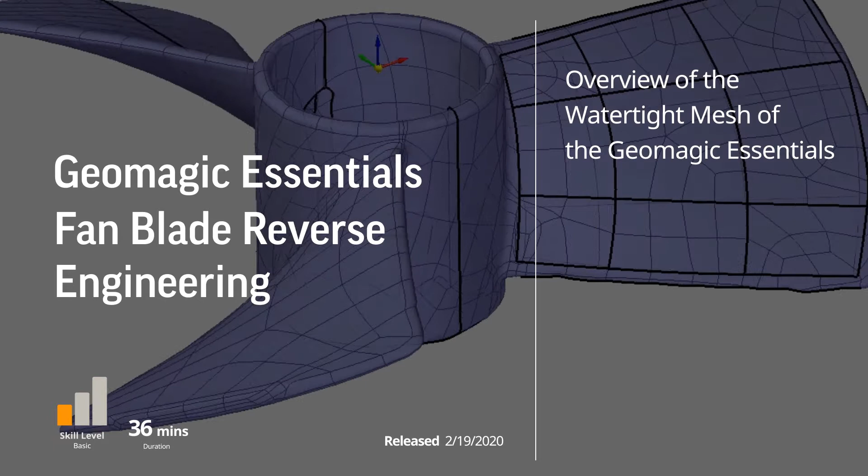This is a basic demonstration of Geomagic Essentials and how it can extract CAD information and send it over to Solid Edge. On screen you see I have a fan blade that was scanned, and this is how the data will come up inside Geomagic Essentials.

You already have a polygon, and in many cases you don't really have to do any cleanup, but I left some of the data to clean up so we'd have time to demonstrate how I would remove areas and repair the mesh before extracting CAD information and sending that over.

As you can see, I put the fan on top of this sphere. So if I want to remove that bottom area, I can look at it from the side, and grab tools from the right hand side. In this case, the lasso tool.

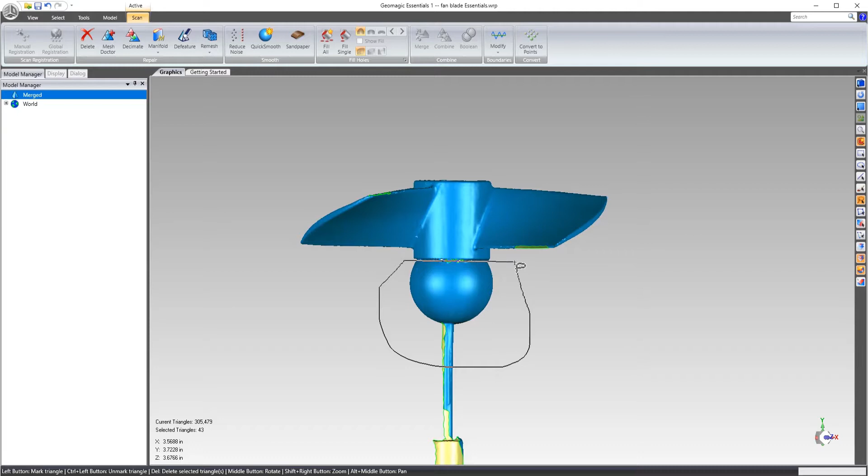I'm going to change it over to select through. With this, I can come in and window-select through, and you'll see it'll go all the way to the other side. Then if I hit delete, I can remove those areas.

If I want to do it again to get a little closer to that edge, I can do that. So I just come in, select, and then hit delete there.

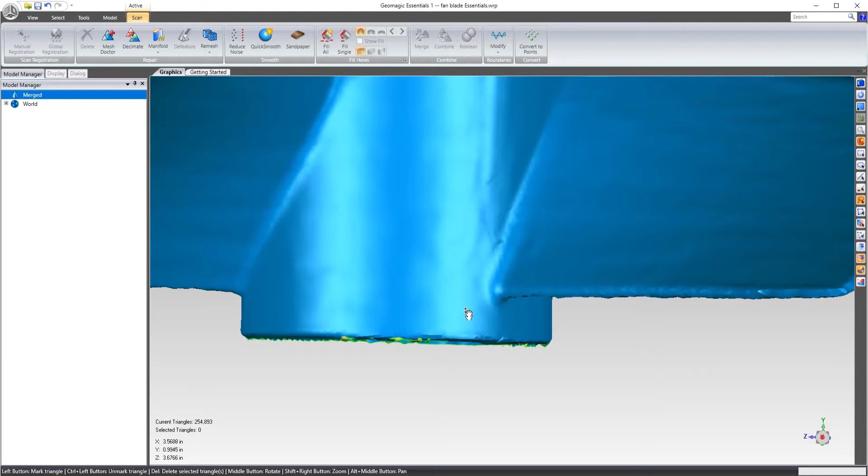There are a few different areas around the part where there are some defects. What I like to do is run what we call the mesh doctor first, because that will correct some stuff automatically and make less work for me. These 7 checkboxes on the left are 7 different categories of problems we find with scanned meshes, and if I hit apply, it'll automatically repair those.

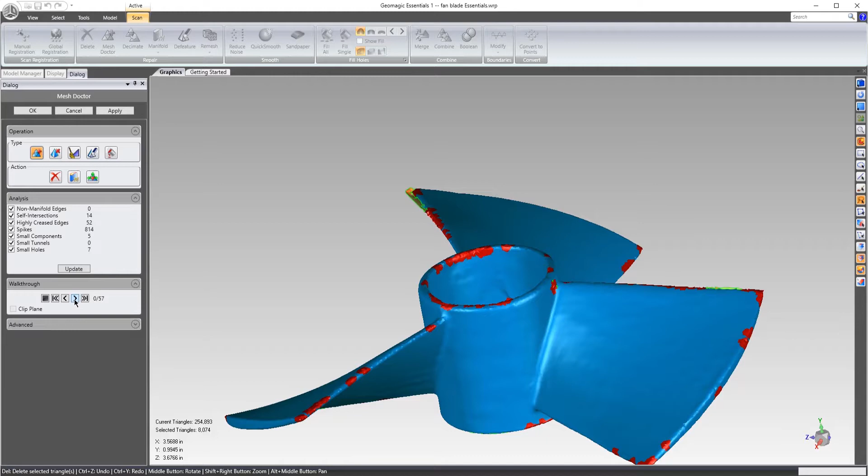But if there's any reason for me to look at those individual areas, I can hit walkthrough mode, and it'll show me each one of those areas if I want to evaluate it and possibly edit it on my own.

So if I hit apply, the software will automatically repair all those areas on the mesh for me. Now you'll notice there are still some holes. Those green boundaries show that there are hole areas we can repair.

The next step after mesh doctor finishes is taking the data and filling the holes for those green boundaries. If I give it a second longer here, it will finish repairing those areas, and you'll see it'll have all zeros there.

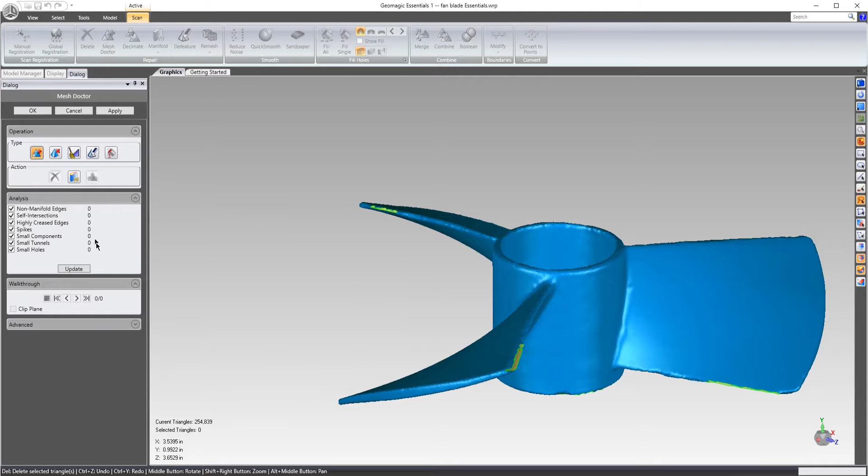Now if I just look around, you can see there's a couple of holes. So if I come over to the fill single tool up top, there are 3 different filling algorithms to the hole fill tool, and below there are 3 different approaches to filling.

So filling the complete boundary, filling part of the boundary, or bridging the boundary. Up top is the method used to make up those missing triangles. If I just click on a boundary, it'll automatically fill using that curvature-based method.

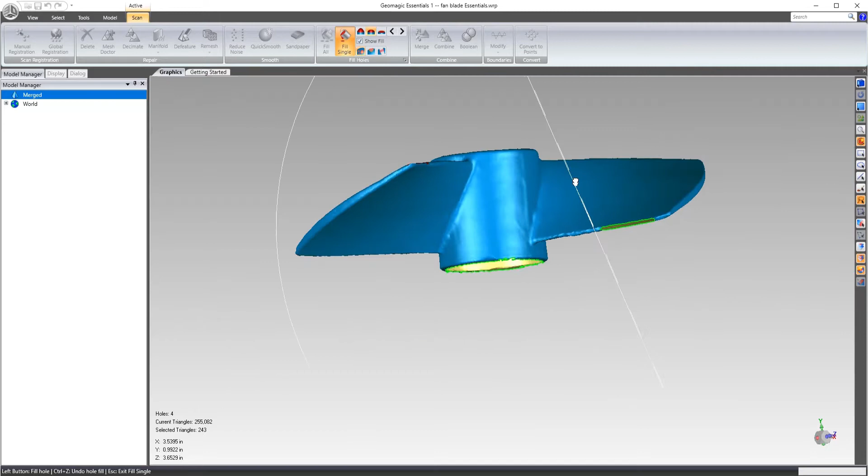Curvature-based method is probably the easiest to start with. Then there's a tangent fill and a flat fill. Flat fill is kind of obvious, it tries to cap off a hole with the flattest approach possible. With tangent, it tries to maintain a nice smooth boundary edge while also maintaining a flat, less curvature approach to the fill.

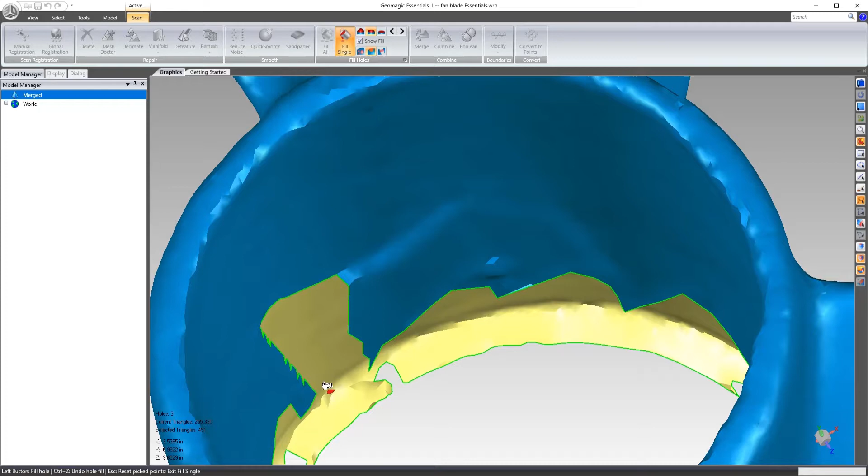This is an example of a fill partial. You can come around and select from two points, then select the side, and you'll see it fills that boundary.

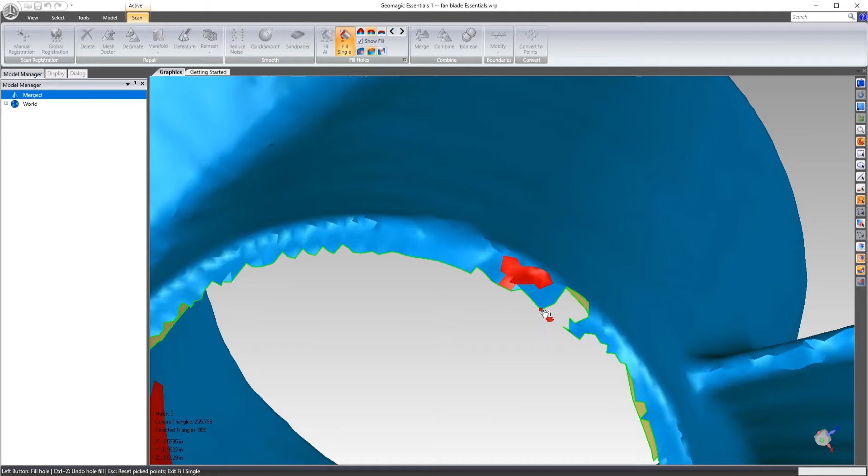And then on the bottom, if you wanted to mess with these, you can also do some fill partials here. But it's not necessary to fill everything because we're not really going to use all this. I just point out that these tools are here in case you need them.

After I get done hole filling, I almost always make sure that I run Mesh Doctor one more time. There's a chance that it will find a few different areas with the hole fill, and I go ahead and run that. It should only take a second when you run it after finishing hole filling, to repair any twisted triangles or anything like that.

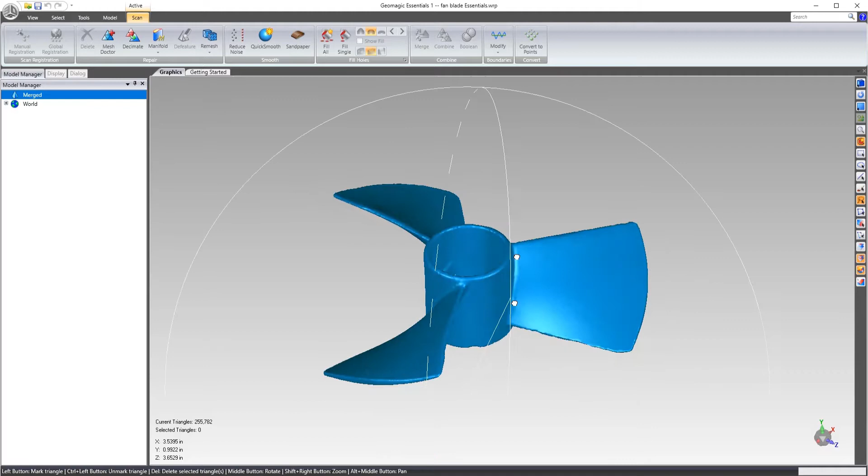So now we have a data set that I want to extract geometry from. But before I can do that, if I click on the widget down here, you'll notice that the part is pretty square to the world axis. But if I come over to display and turn on the world coordinate system, you'll see that the coordinate system is way over here, far away from the world coordinate system. So what we need to do is align this object to the world coordinate system.

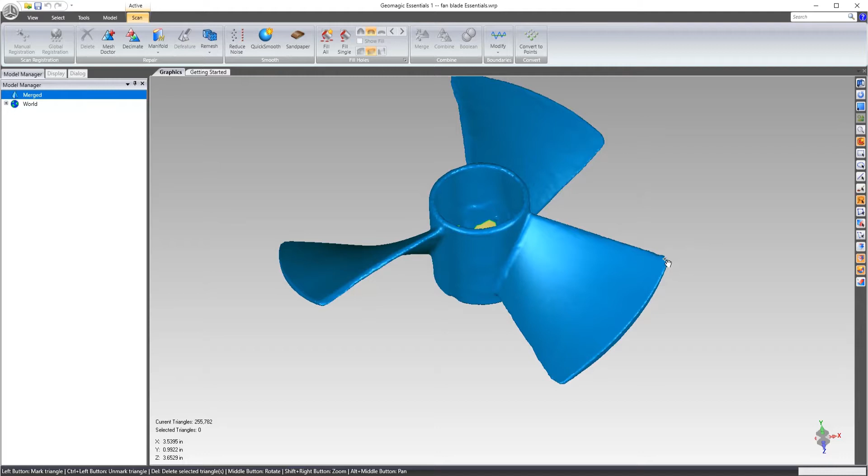With a fan blade, what I typically use is the axis, the central axis, and maybe the top plane. A lot of times I will grab one of the impeller blades and then fit a point there to index it. So I'm going to go ahead and create that geometry, and I'll show you how that works.

If I come over to model, what I'll do is come over and create a line based off this first option, cylinder axis. You can come in and use the same tools that we use for selection, the lasso tool, but make sure that you turn off select through and toggle it back over to select visible. So you can window in areas like this to select that outer cylinder to create a cylinder axis.

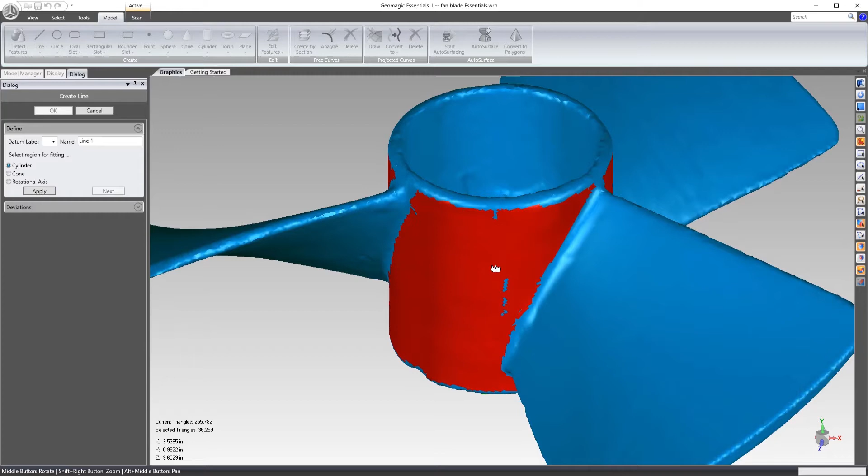But what I like to do is use this option right here, this crease angle tool. When I click and hold with my mouse and drag up on screen, it will select more and less data. So you see it went all the way around and essentially grabbed all the faces that I want to use to create a cylinder axis. So if I just hit next and OK, we just fit a cylinder axis there.

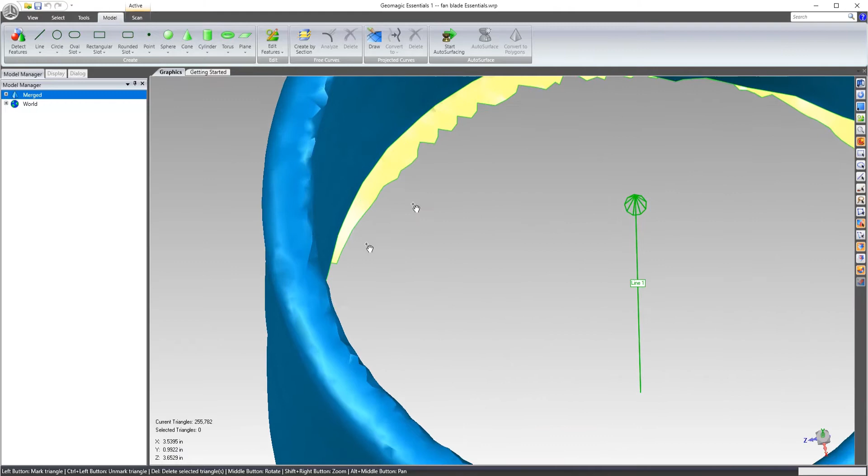Now the next step is to put a plane on top. The top surface isn't as well defined because it's a pretty sharp, small landing area. So what I like to do is grab that lasso selection tool and just click some areas on that top surface, because there's so much curvature there that's not enough for that other method to work.

And then this will give me enough averaging all the way around the outside that I can get a pretty good plane. Not only that, when I do the alignment here, I'm going to use that central axis as my main axis anyway. So that's going to be the primary axis of alignment.

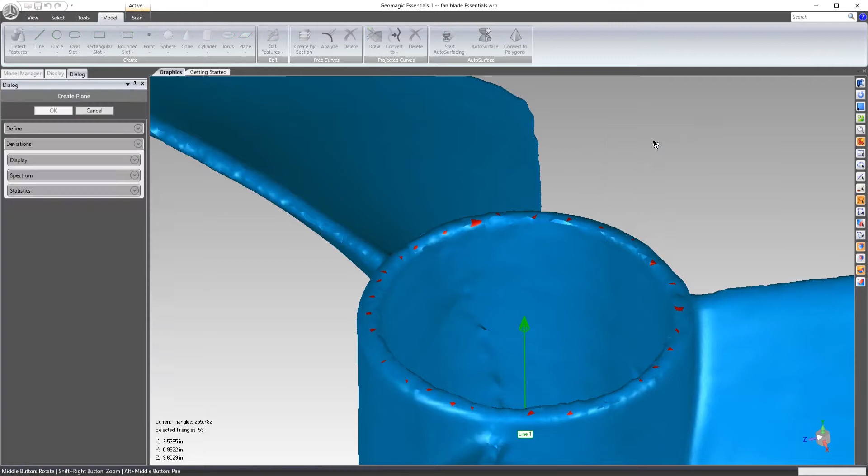What I do now is if I right click in the open space on screen, you see that we do put the shortcuts for plane and cylinder. So if I click the plane, I can hit apply, and you'll see that it best fits a plane to that surface. So then I'll hit apply and OK.

Now, if I want to intersect those two, the axis and the plane, I can come over to point, and you'll see plane and line. Then I can actually select that plane and the line that I created, and create an intersection point there.

The reason why I did that is I'm going to come over here and select a little bit of the tip there, and then I'm just going to fit a centroid point, and this is just to give me something to clock it to. I could fit a line there if that line was straight, but in this case I'm just going to use that point.

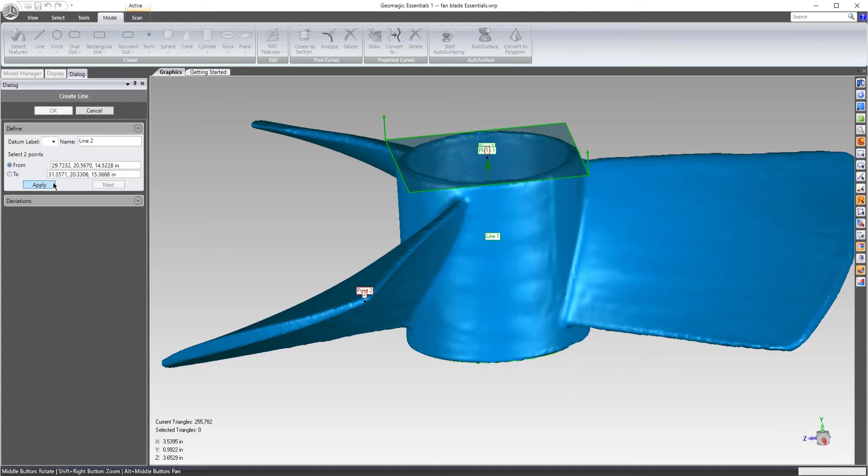In this instance, I'm going to grab that point and come over to a 2-point line. You can see I can click the from and to, and then hit apply, and it creates a line there. So there, I essentially created enough geometry to create an alignment.

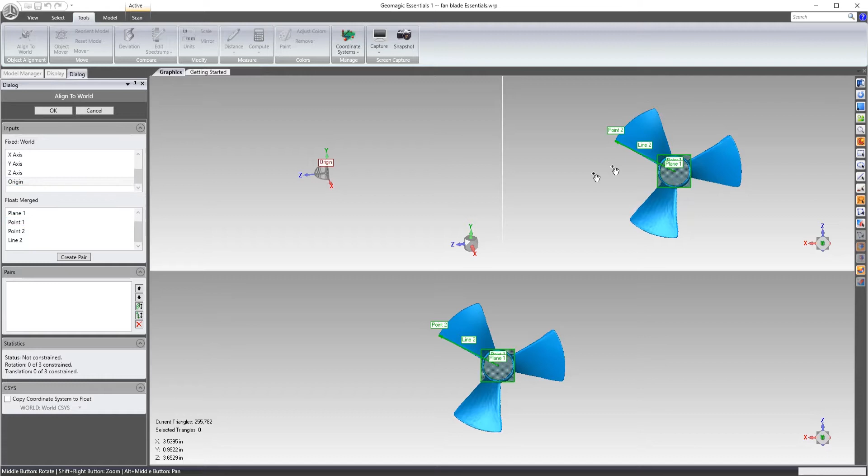So now, if I come over to my tools and click align to world, the top is all of the things in the geometry already, so the X, Y, all these planes and axes, and even the origin. And then the floating is all the geometry that's on my model.

So what we're going to do is click on that center point and the origin and create a pair. And we will do that one more time. We're going to create a center point and the origin.

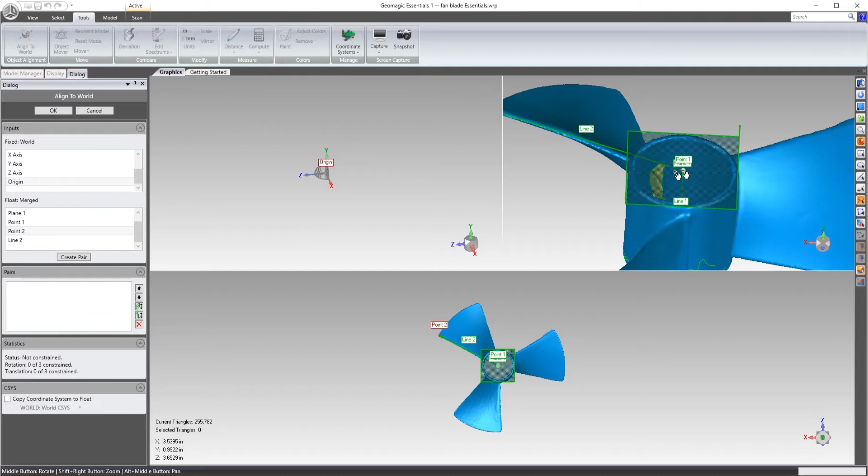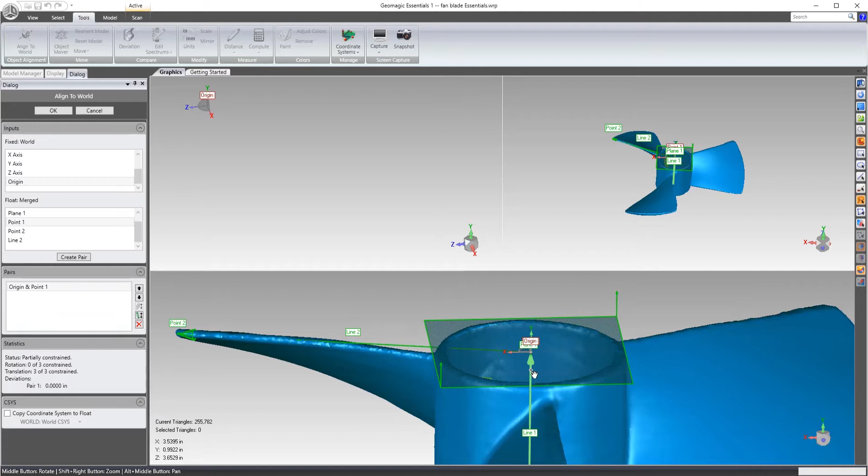Actually, I think the issue is I clicked the line, so let's do that one more time. I click on the point, the origin, create a pair. Now we locked in the wrong point, so I'm going to delete that one. I clicked point 2. If I click on point 1 and the origin and create pair, now you'll see the coordinate system is sitting on top of that axis, exactly where we created that point.

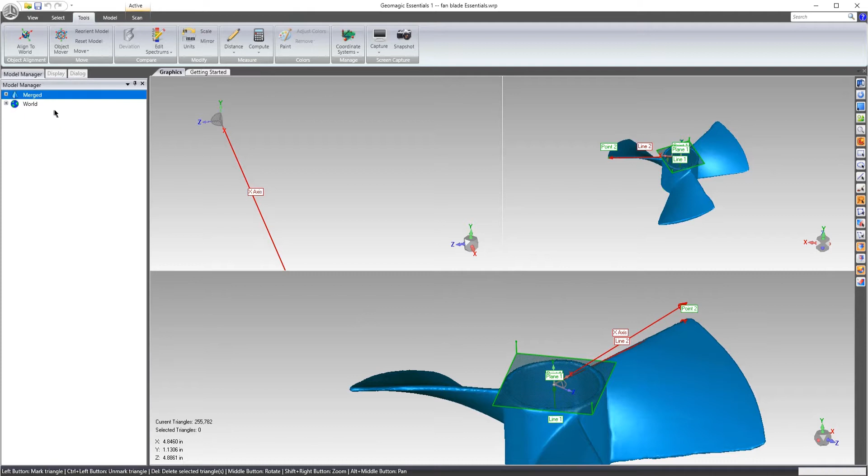Now what I'm going to do is square up that axis to the other two pieces of geometry. I'll take that line and align it with the y-axis, and it'll square that up. Then to clock it, I'll align the x-axis with my other line, that line 2 we created, and it will square that up. Since these stack on top of each other, the point, then the axis, then that line, it's not locking those two together, it's only rotating it until it matches. When I hit OK, you'll see that it squares up the alignment of this part, aligned to the world coordinate system.

So now that I have that, I can go ahead and cut cross sections and create curves. So now begins the modeling portion of the demonstration.

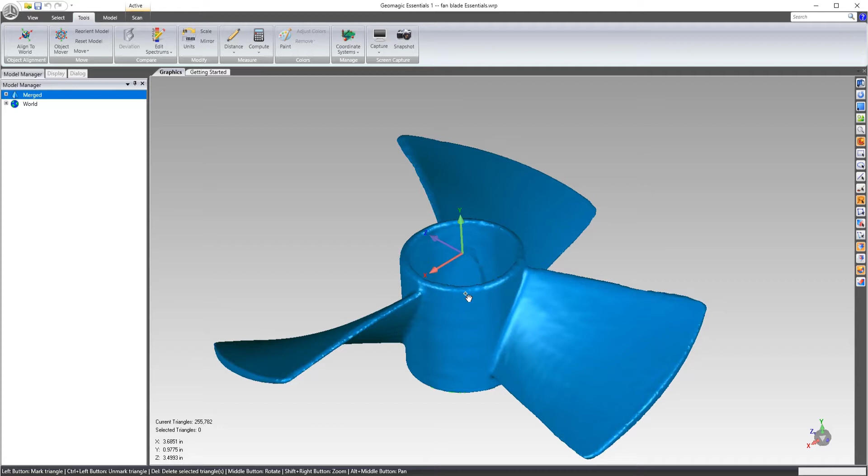What we're going to do is cut a cross section through the center of the part, so I have enough geometry to create that revolution or extrusion, depending on how I want to do it. And then we'll create geometry that represents that fan blade.

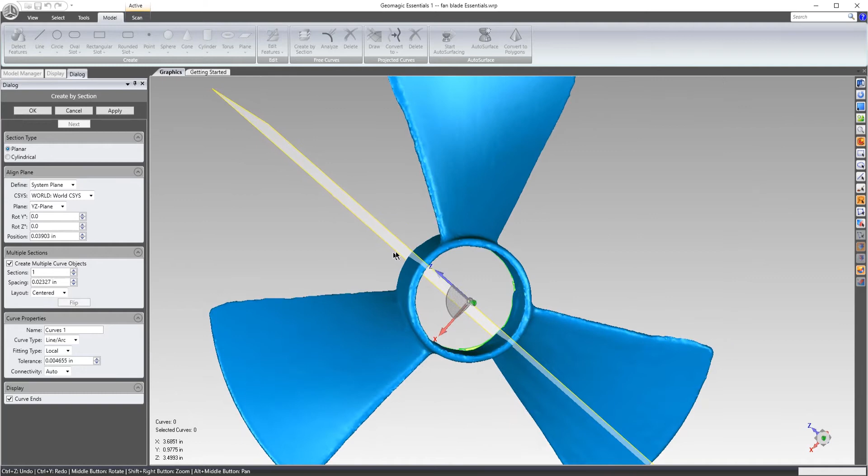The first thing we're going to do is cut a cross section. You can see I can toggle and change the cross sections over here. I'm going to use the YZ plane and slice through in that direction, then make sure that the position is at 0, so it'll move it so it intersects the 0.

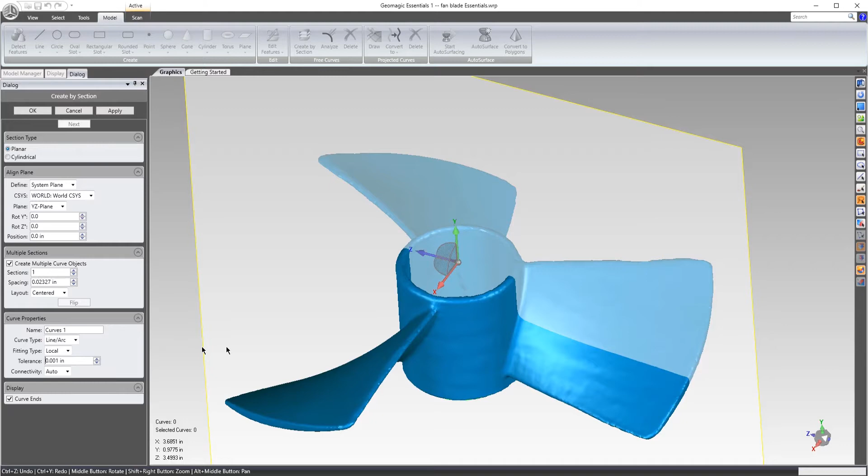Now down below you have an option. You can tell the software to cut a cross section through the polygon mesh with a spline, line arc, or polyline. For a highly organic shape I would use a spline, but for something pretty prismatic, in this case, I'm going to use the line arc option. Then I'll tell the software to go ahead and fit that, and I'll adjust the tolerance all the way down to about 1/1000th of an inch. When I hit apply, you'll see that it creates a sketch cross section through that geometry for me.

Then if I hit next and OK, you see now that I have these curves. So if I hide that polygon, I have the curves cross section.

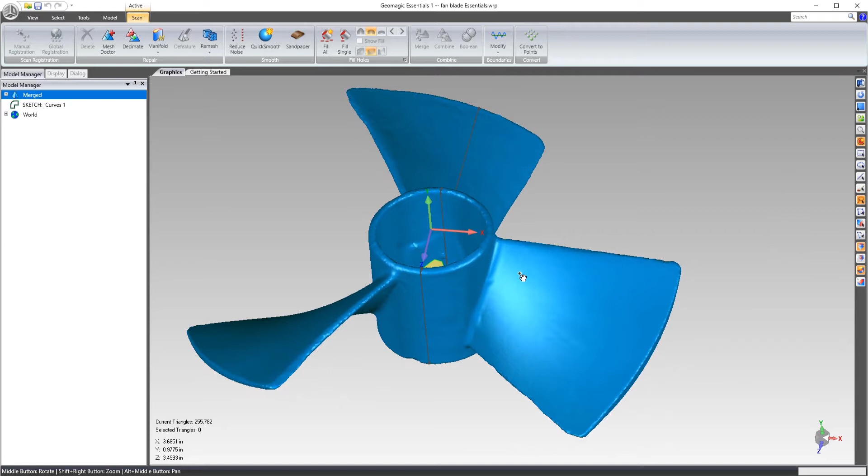So now if I toggle back over to the polygon mesh, the way we'll do the blade is this. I'll identify which blade I'd like to use. In this instance, I'm going to use this one, the one that I went ahead and used to align to the x-axis. And if I want to just send curves over into Solid Edge, the best way to do that is to come over to the model, and there's this draw curves option.

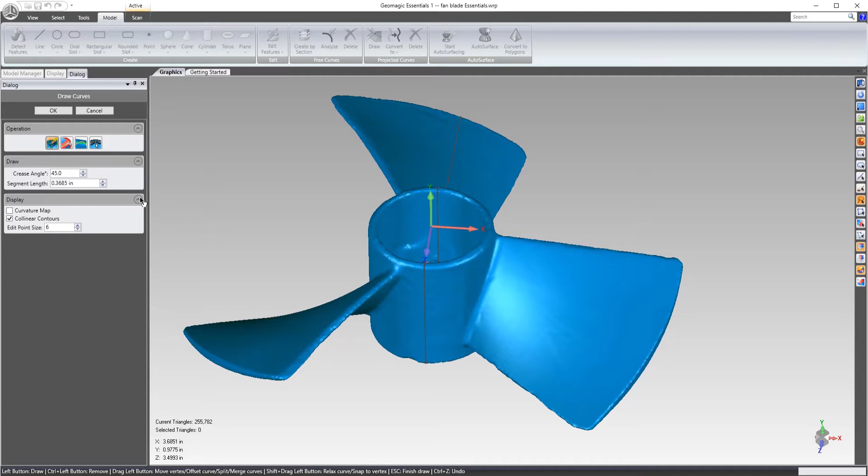So you saw before I did create cross section through a mesh. Now I'm going to draw curves directly on the mesh. This dialog can be a little confusing when you first see it, but if you basically use the first tool and then look at the options down here on the left hand side, it's not quite as confusing once you understand a couple things.

So if I click on the mesh, you can see that I can just draw curves on the surface of the mesh. Once I get to a corner, if I hit escape, it will end that curve. If I need to drag anything around, I can just roll over and drag the nodes of the spline. If I need to remove any of these nodes, I hold Control and can remove them from the spline. Then if I click back on, I can create a new one, but I need to hit Escape again to get out of it, because otherwise it'll start drawing another line.

So speaking of that, if I come over here and start drawing, I can create another spline and then hit Escape. Again, you can always come back and manipulate the curves and move them around. A red node is an endpoint that divides up multiple splines. So essentially, if a spline has all orange dots, it's all one spline, and a red node like that means that's the beginning and end of a spline.

So you can see that. And you can actually convert these points to using endpoints, and you see that all the options are down here below. So to try to get more accuracy here, I'll just create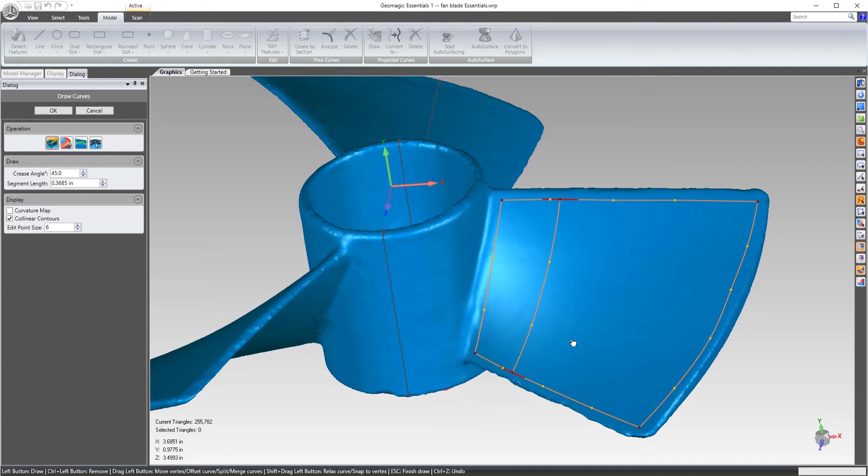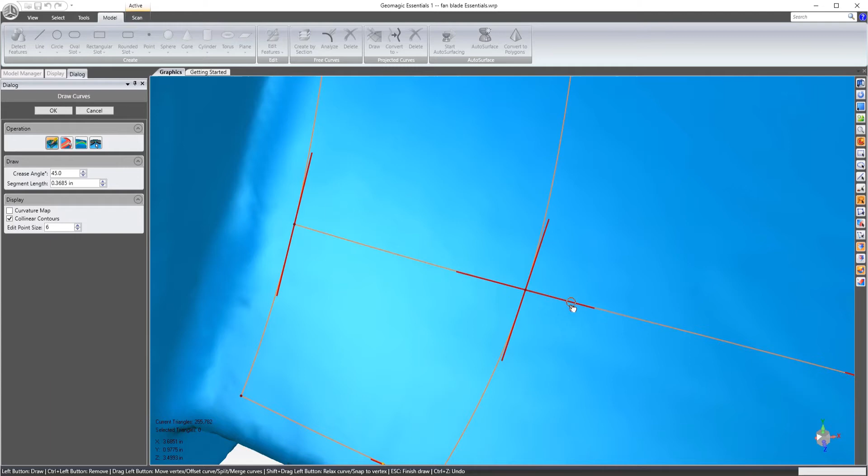Some cross sections through the blade. And you'll notice those red curvature collinear contours. What that is, it's showing you that there is tangency there. So there's a shortcut here. If I click and hold and drag from one side to the other, I can turn tangency off or on. But they just show you that it's there or not, so you don't have to use them.

In this instance, it's probably not that important, because on the Solid Edge side, these are just going to be used as a guide anyway. So these are just to give me enough resolution to draw them inside of Solid Edge, or convert them inside of Solid Edge. So you can see that I went ahead and I selected those curves and I drew them.

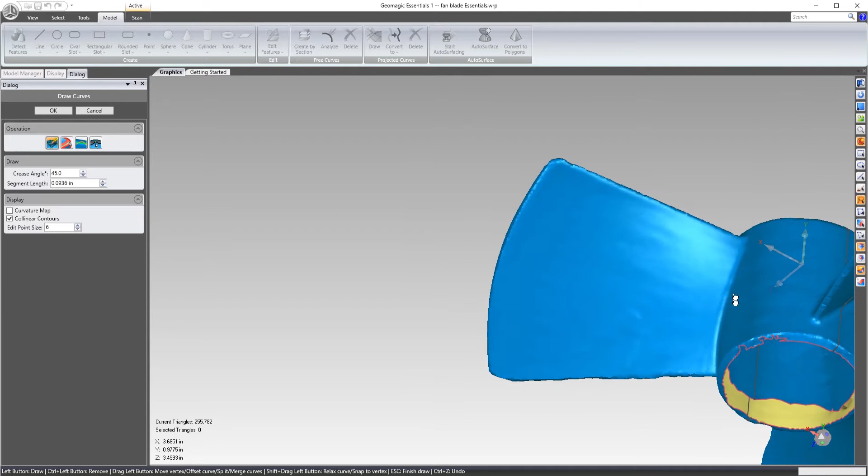Now, actually, let's go in and draw them on the other side, because this isn't necessarily a constant thickness blade. If it was, I would just draw one side and offset the surface that I use, which many of the companies that make these all know when they're designing it whether it's supposed to be an offset or a constant thickness blade.

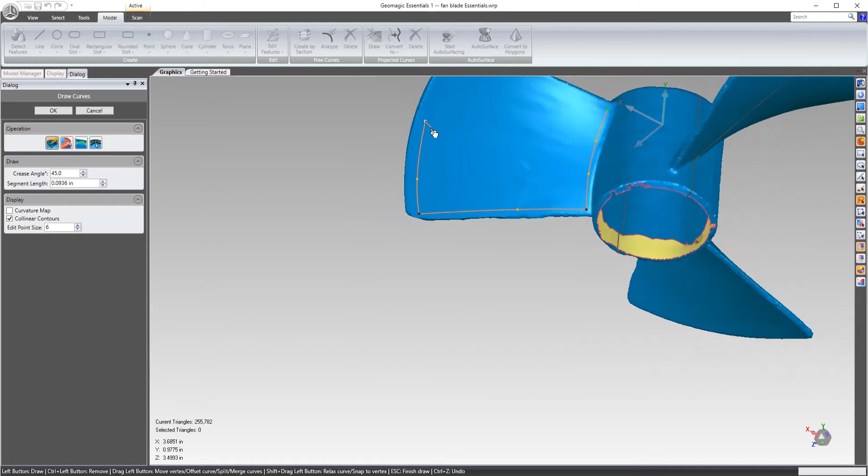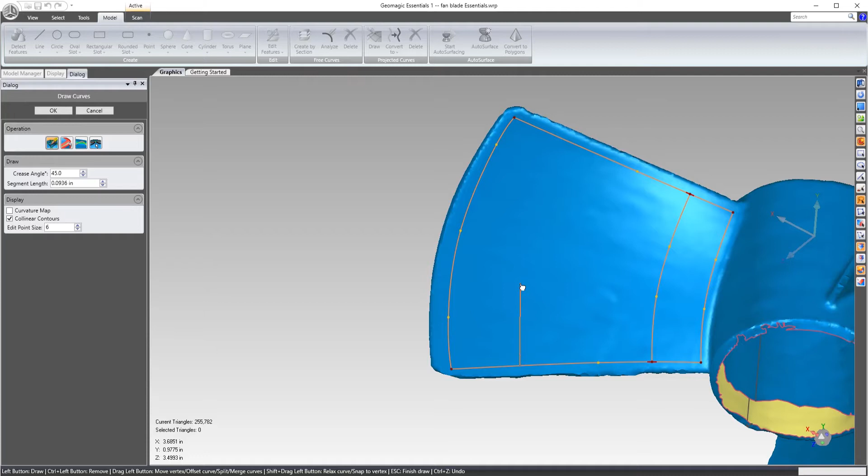So I'll do the same thing, and I'll just come around. And then draw these. Actually, let's undo that one and end that right there. And let's start that one again. There.

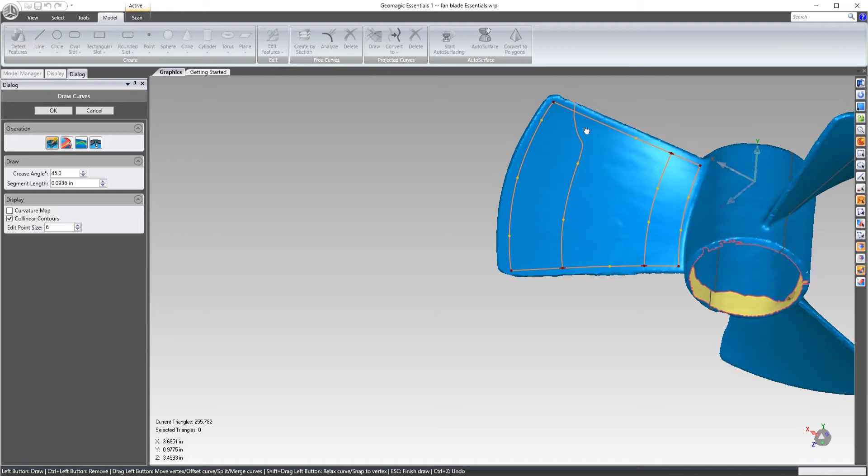Now I'll just draw these last few. There. And you can move these. So if I want to drag this out, it's really handy to be able to slide these around and add points. So if I add a point and then move this, so if I want it to follow the flow of the surface here.

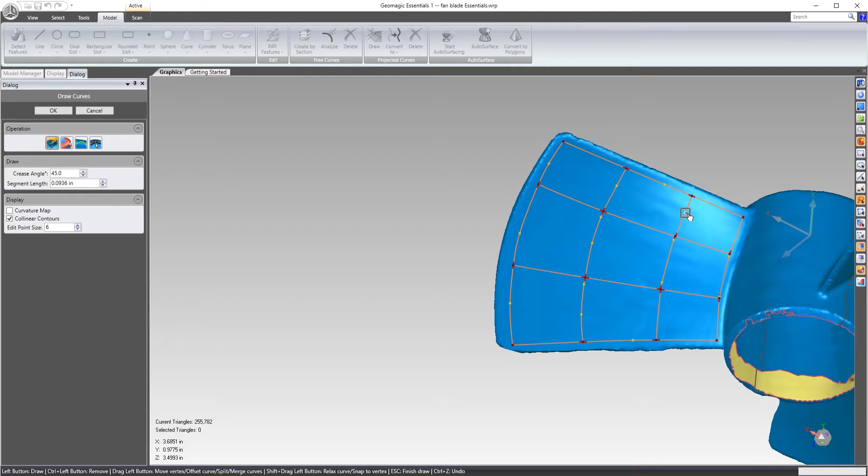And once I'm done, I have the curves. The next step is to convert the curves to free curves. And in this instance, again, I'll lower the spacing to like half a thou just to give it a little extra accuracy. And it's telling me that the lowest it can do is 2 thou, which is fine.

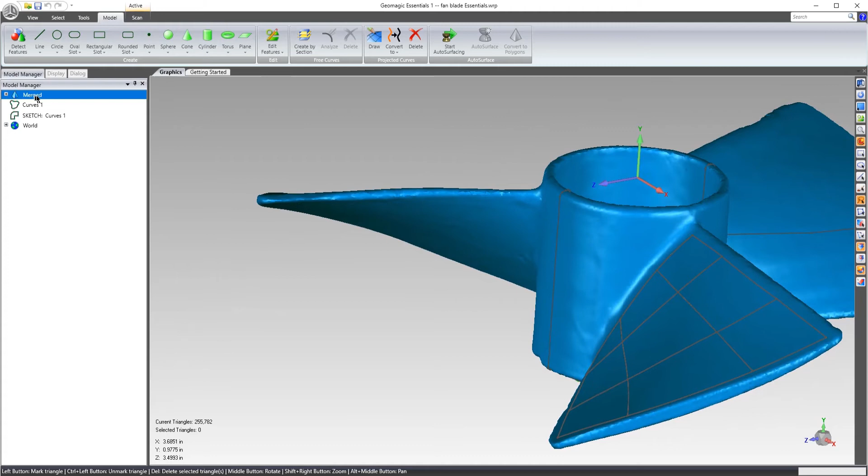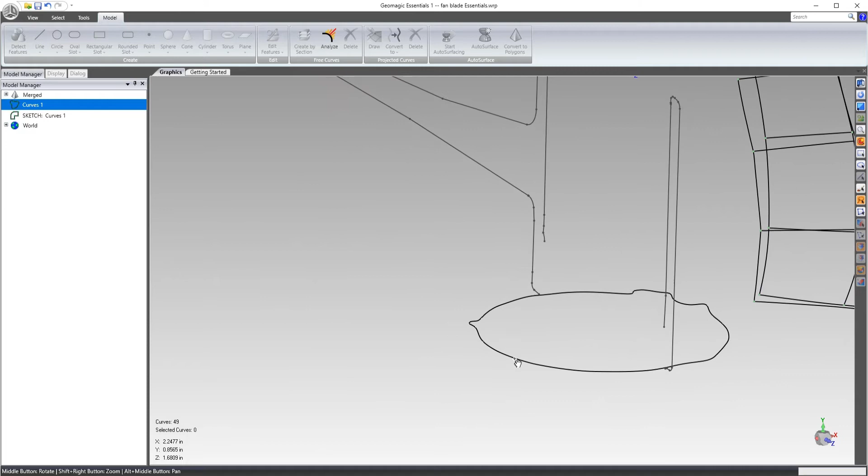So now, if I hide this, I have curves. So when you use that convert to, it also converts the boundaries of the mesh. So if I don't want that, I can actually just click on it and delete it. The same thing goes here. So if there's holes in the mesh, those will show up in there. So I'm not gonna bother deleting that. It's nice to have that one just as an example to show where it is, but you can see all my curves.

And then the other thing that you can do with this, so there's 3 types of geometry that we can extract from the model. One of them is prismatic features, which we used for alignment in this instance. The second one is cross-section curves. The third, actually 4 types of geometry, is cross-section curves and splines on the mesh. I guess you could create curves, whether they're 3D or 2D, as one object. And then the other one is auto-surfacing the object. So auto surface will go ahead and wrap a surface around the outside of this object and create a CAD body that you can then export and send it over to Solid Edge.

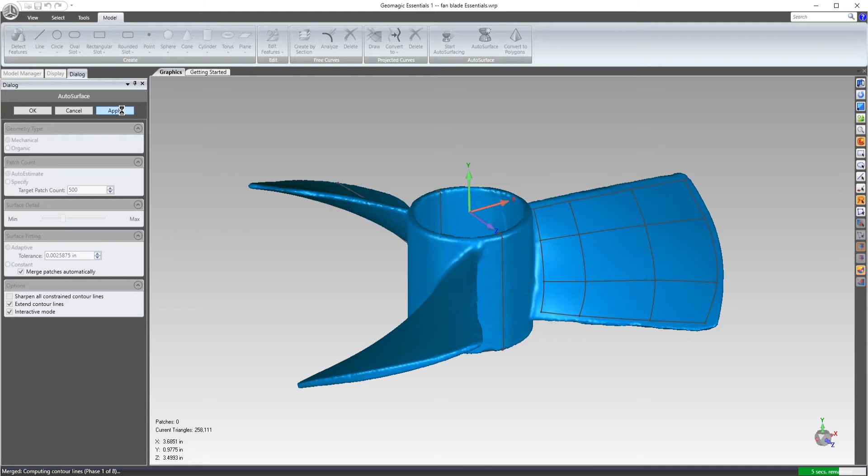So now the auto surface is finished. So you can see the curves, the CAD solid—well, it's a surface, not a solid—and the features. So I can write all of these to an IGES file and send them over to Solid Edge. So if I grab all of these, I can save them out to an IGES. So that's the next step, is to go ahead and save these over to Solid Edge.

So if I just come over to Save As, IGES, and it will just name my file.

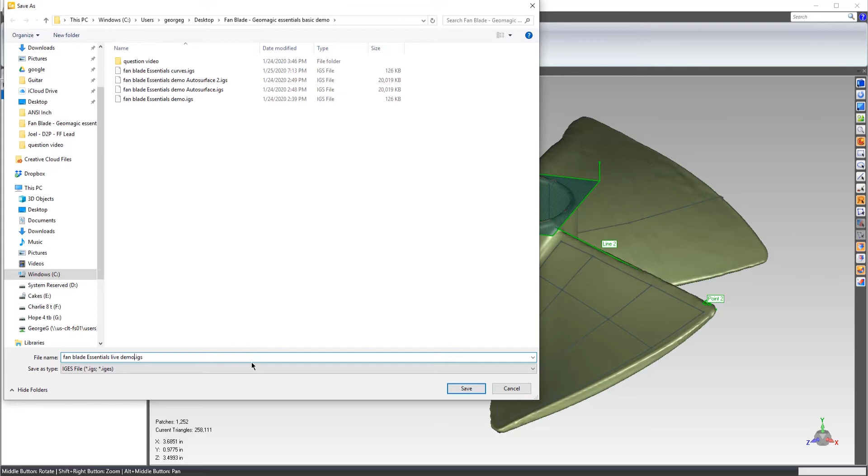And write those out. It pops up with an export option dialog, so you can actually tell it to not write out the NURB surfaces if you don't want those, or don't want the features or curves. So you can choose what you want it to write, and then you can actually tell it to write in a single file. So I'll hit save.

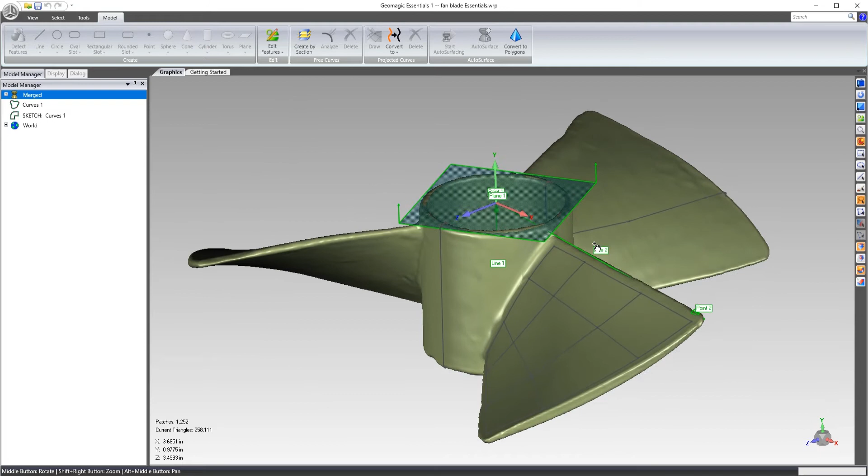Now all you have to do is open that geometry inside of Solid Edge and use that to start modeling. In the next portion of the demo, I'll show a little bit about Solid Edge modeling and how you can take that geometry. I'm not a Solid Edge expert by any means, but I can definitely show you some of the basics to get that data inside of Solid Edge.

So now for this portion, we're going to finish the part inside of Solid Edge. As you can see here on screen, I have the auto-surfaced portion of the model and the curves in the same workspace. So if I turn off the surfaces, I exported the curves from Geomagic Essentials.

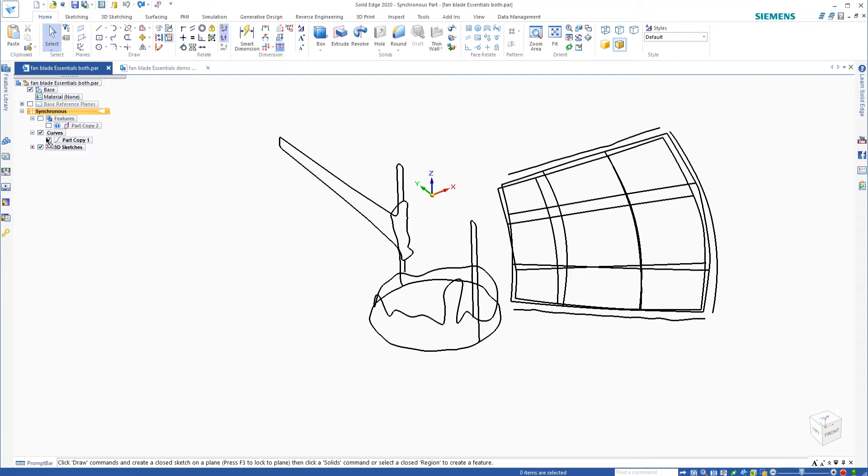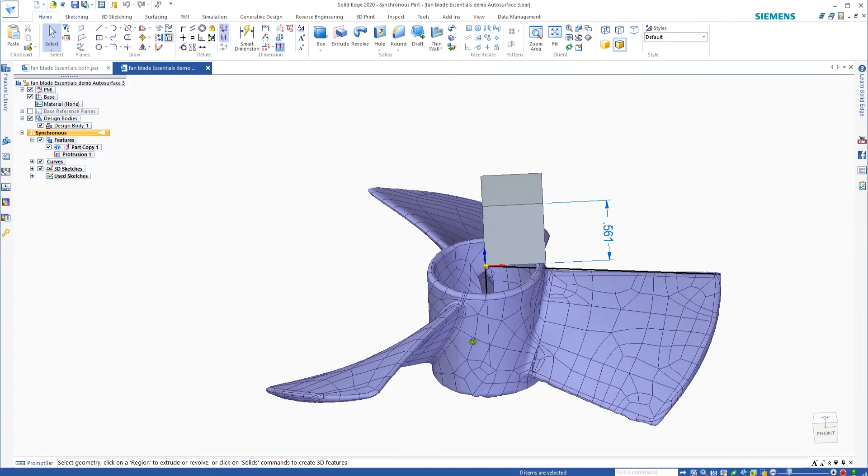And then I exported the auto surface. What I did is I went over to the application and imported each IGES file from Geomagic Essentials, brought them in and saved out the part. Then I came over and I took one part and copied and pasted it inside of another, so that we have both the curves and the surface inside of the one workspace.

So now you can reverse engineer using the Solid Edge tools in whatever fashion you want to. For today, just to keep it simple, I'm not an expert in Solid Edge, so what I'm going to do is use the curves to reverse engineer this part, and then use the auto surface as a reference to see where I'm at and what I'm modeling.

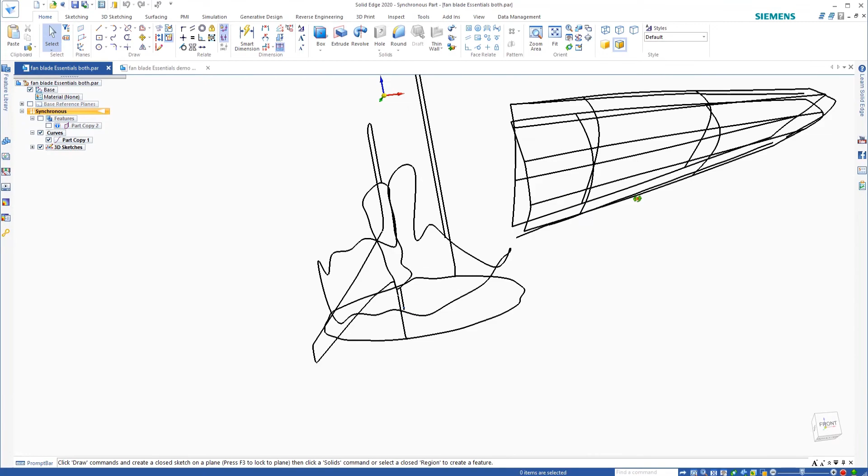So the first thing I'm going to do is go ahead and model the fan blade here. As you see, I have the curves that I brought in from Essentials. In order to do that, I'm going to come over to the surfacing tab and create keypoint curves over top of the curves that I brought in.

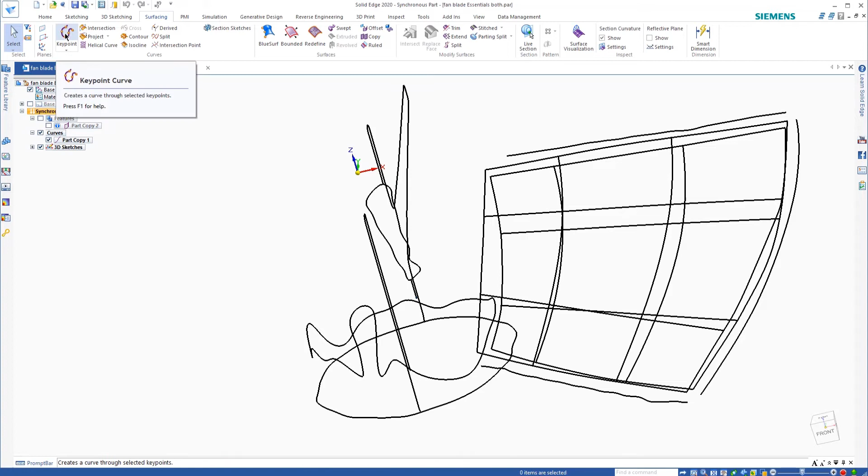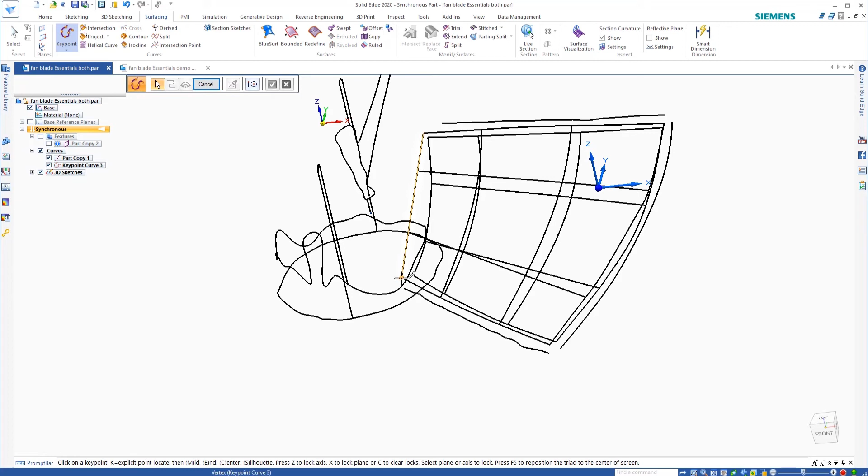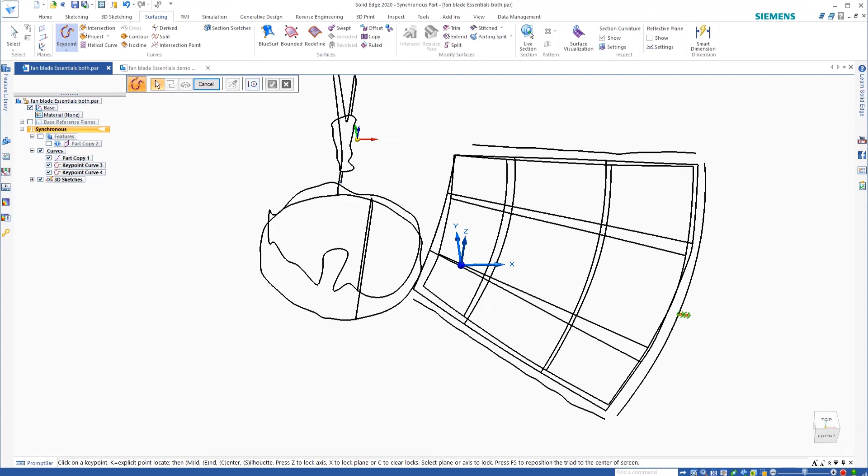So what I'm going to do is go ahead and draw over top of nice clean keypoint curves. I'll come over to keypoint and draw right over this. I may fast forward this a little bit so you don't have to watch me go over every single one, but I click finish on that first curve. Now, just to show you that I did do that, I'll turn off my initial curves and see that I drew that curve directly over top of the other ones.

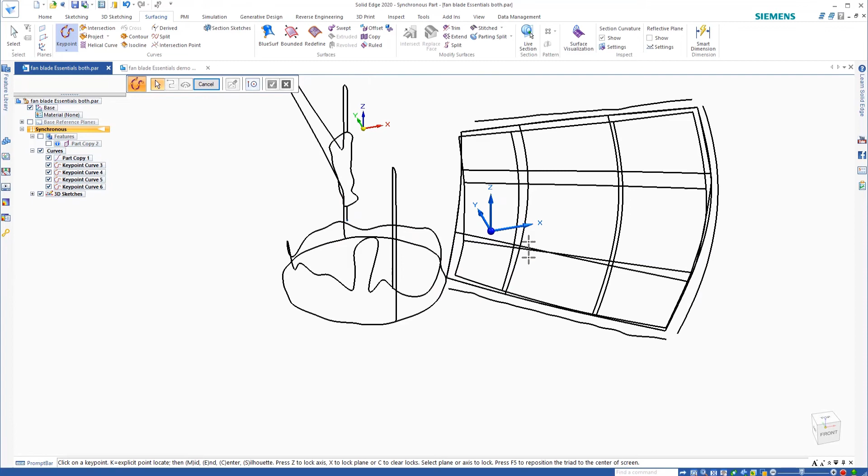All right, so I drew the outside boundary. Now, if this was just a straight boundary fit surface, I would leave the inside pieces alone, but it's not—there is a shape to this inside. So I'll go ahead and grab these ribs that go across the middle and draw those.

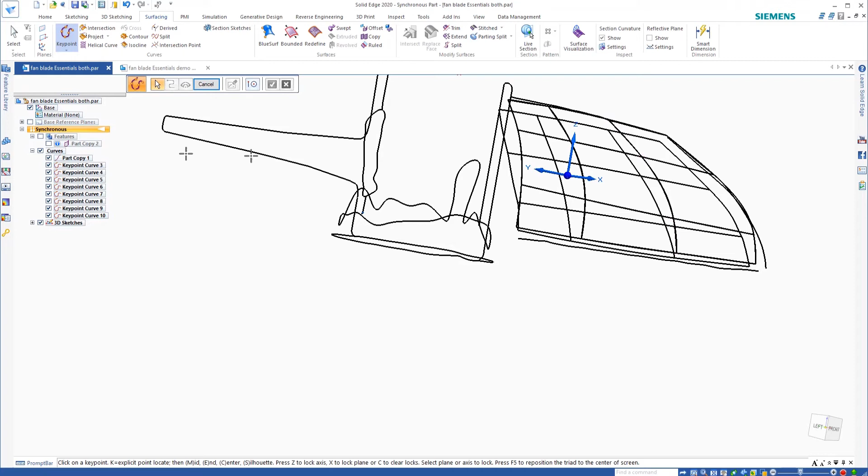Now if I go ahead and complete that, you'll see that I drew the entire surface here—both the top and bottom. Again, this is where it's nice to have the surface in the background, because they're not exactly the same. It's not a consistent thickness surface on this blade. So now I'll go ahead and turn that off, which means I have to model the bottom side as well.

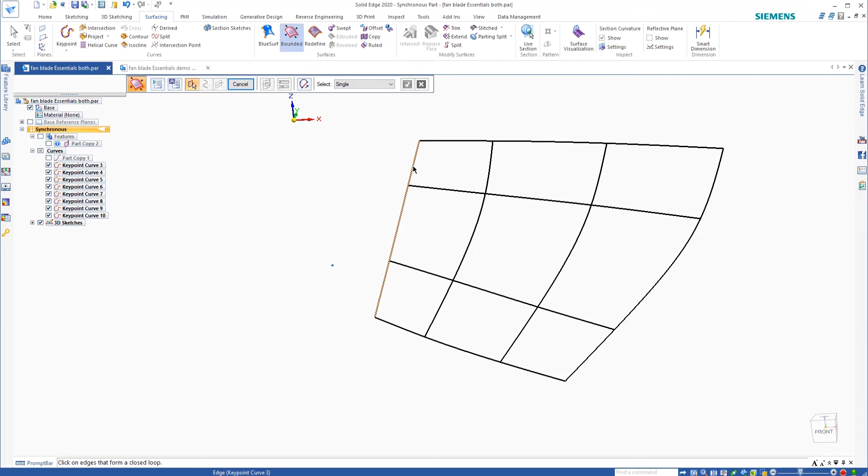But before I do that, we'll go ahead and create a bounded surface. So if I just select the four sides, and then I accept it. Now if I come over and select the guides, I add these guides in, and then hit OK.

So now you can see that I created a surface from that top area. Now if I turn on my curves again, or my surface, you'll see that I need to extend it past, because what I'm going to do is extrude a top shape from here. I'm going to use the surface to trim the top and bottom.

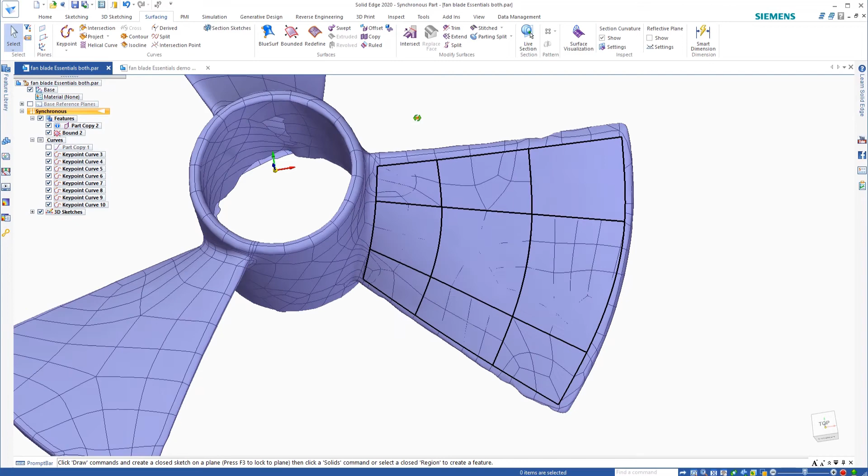So what I'm going to do is turn that off, and then I'll hide my curves—get rid of those. And then if I come over to the surfacing tab again and go to extend, I can click on these boundaries here.

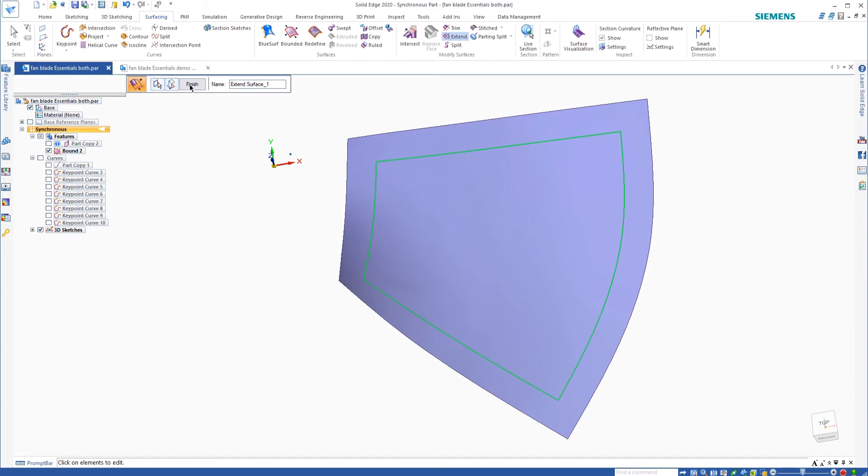And then extend those out just a little bit. So now if I turn that on, you can see that I extended that far enough that I can trim that top and bottom. So now let me go ahead and model that bottom side.

I'll go ahead and model it and be back in a sec. So now you can see that I modeled the top and bottom surfaces.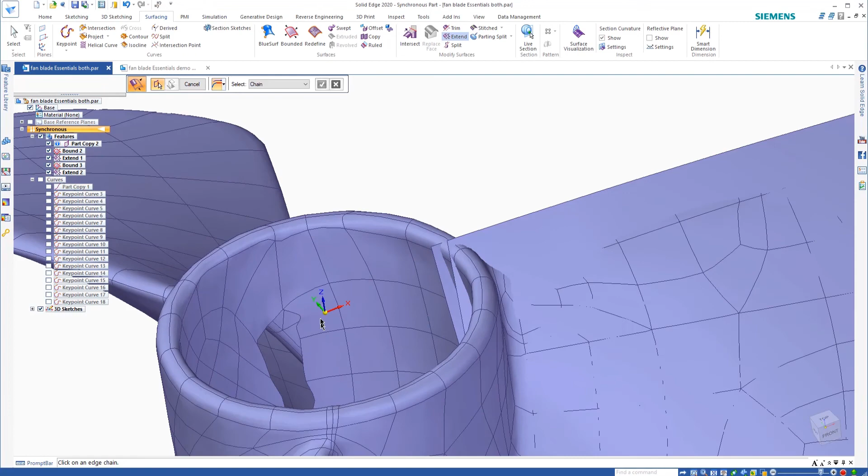So in order to do that, I'll just go ahead and sketch on this top plane here, because this is already aligned to the world coming from Essentials. So I'll come over to sketching, and we'll go to line, and we'll go ahead and select this base plane here. And then I'll just click over to my view here and go to my sketch view.

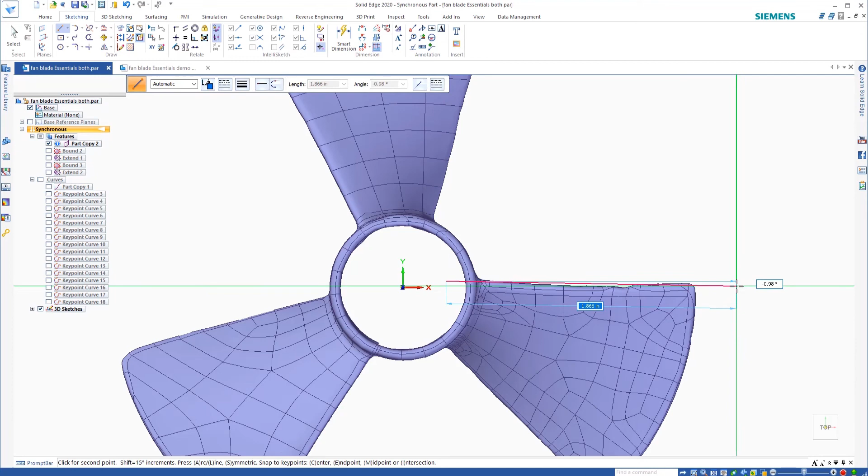Now I can go ahead and hide those surfaces if I want to, and just model directly over top of the auto surface. So if I come over to sketching and use my line tool and just draw a line out in space, another line out in space here. We'll just reposition that.

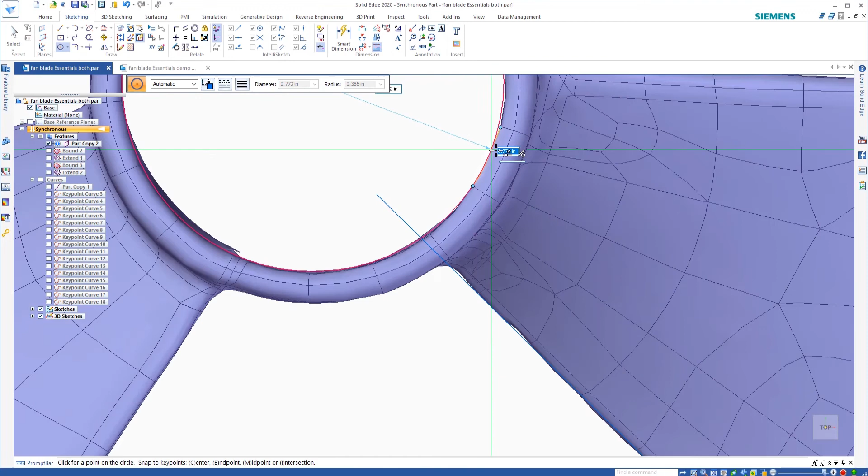And then I'll go ahead and draw a circle from the middle, and I'm going to just draw it down the middle of this solid there. You'll see here in a second why I'm doing that. And then we'll snap that to the outside.

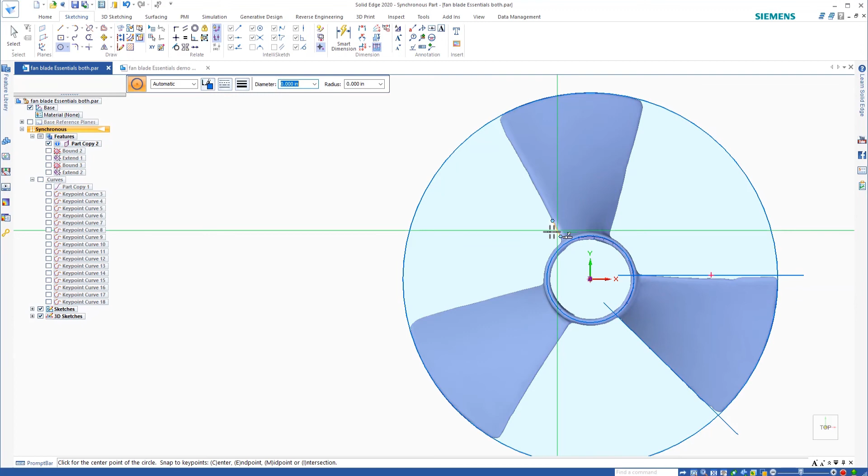So with Solid Edge, I don't have to necessarily trim all these pieces together. I can just rough out my sketch and then get out of it and then come over and do an extrusion just using that profile and select what loop that I want to use. So if I come over to click on this area right here and accept it.

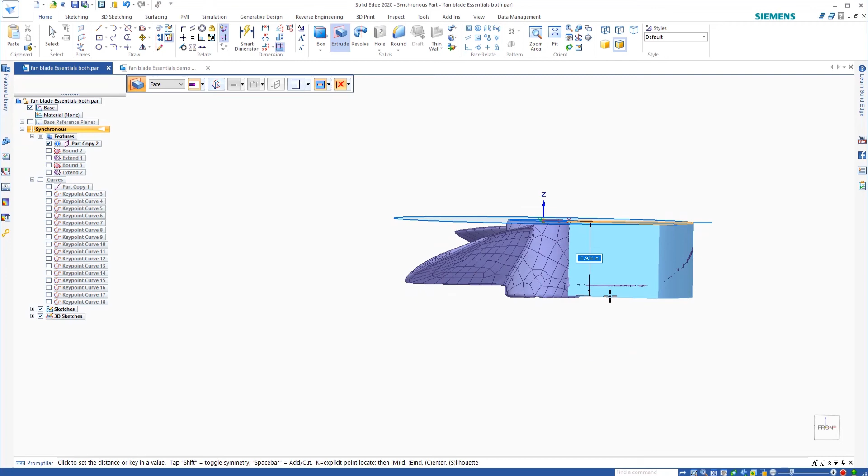And then let's extrude this 1 inch. So let's actually edit that and do like 0.93 there. And you see, you can use that as a reference to see, and make decisions reverse engineering how I want to.

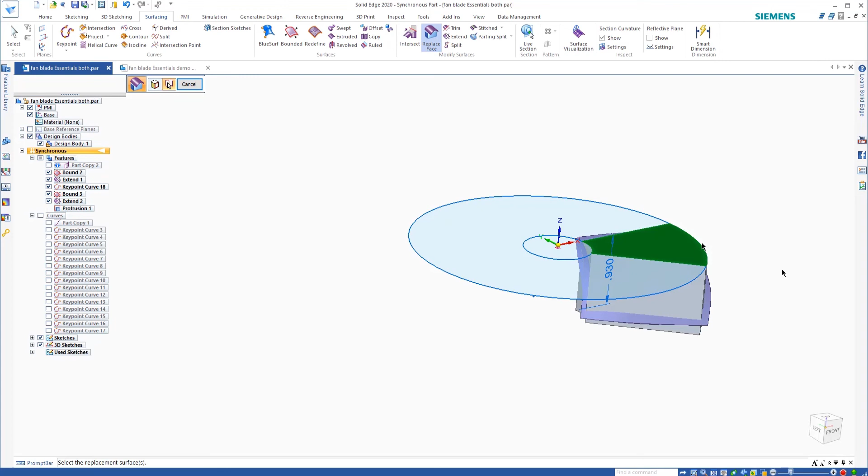All right, so now I'm going to go ahead and use my surfaces. See that top surface and the bottom surface here. So if I come over to surfacing, there's a tool called replace face here. What you can do is select the face that I want to replace, this guy right here with this one, and you'll see that it will trim that top surface there.

And the same thing goes for the bottom. If I select that, accept, and then it will replace that face there. So now you see that I have my blade created.

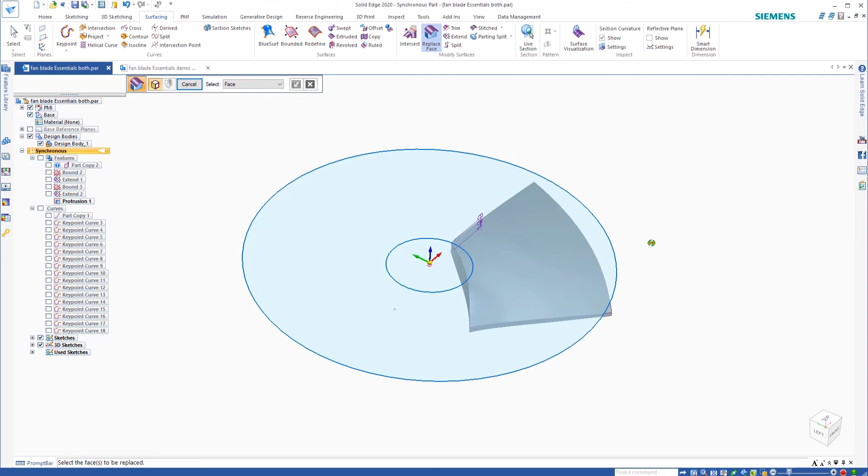So from here, there's a few different things you can do. You could go ahead and pattern this now if you want to, or we can go ahead and draw the center. So if I come over here and I click on this and go to sketching, we'll go ahead and select that plane there. And then let's go to view, sketch view again.

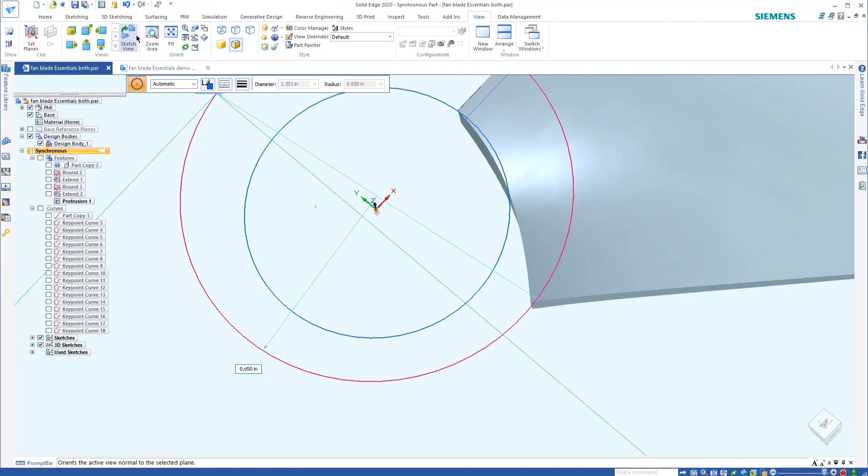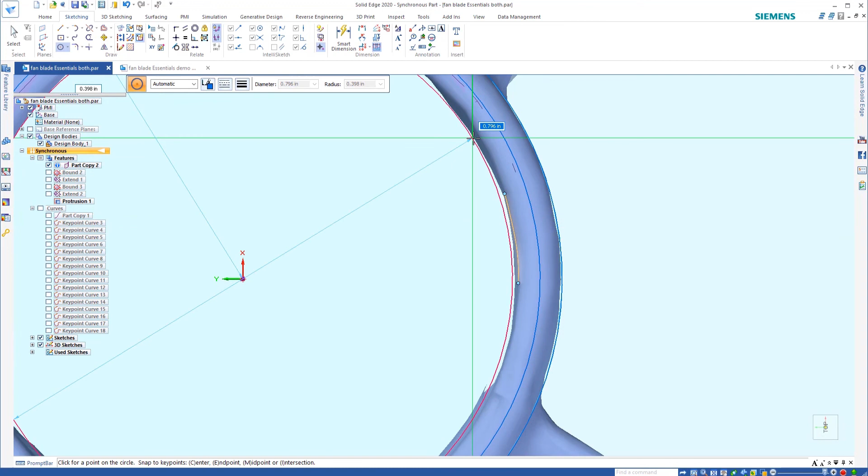And this again is where the auto surface comes in handy. So you can come back over and turn that on. And let's create our inner and outer shape. So I'll just create that, the outer and inner. And again, you can dimension it as you see fit. But you see that I just drew the two shapes.

But you can redimension it like I just did earlier, and then come back over to extrude, grab this area here, and then extrude that. Let's do that 0.93. So there we have our shape.

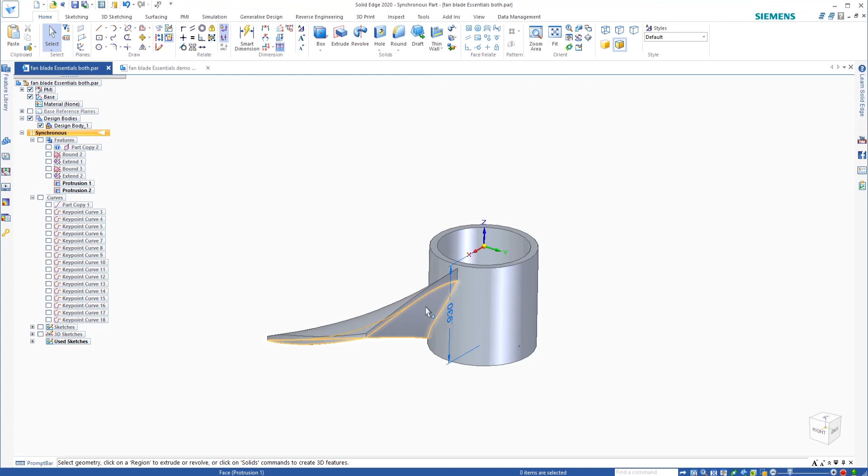So now if I want to go ahead and turn off the curves, show the solid, now I can come over and just pattern the part to create a pattern of this blade around the middle. So in order to do that, I'll just come over to the pattern tool. If I click on the object that I would like to pattern, the first protrusion, you can see that I have the option to do a circular pattern over here. So I can select circular pattern.

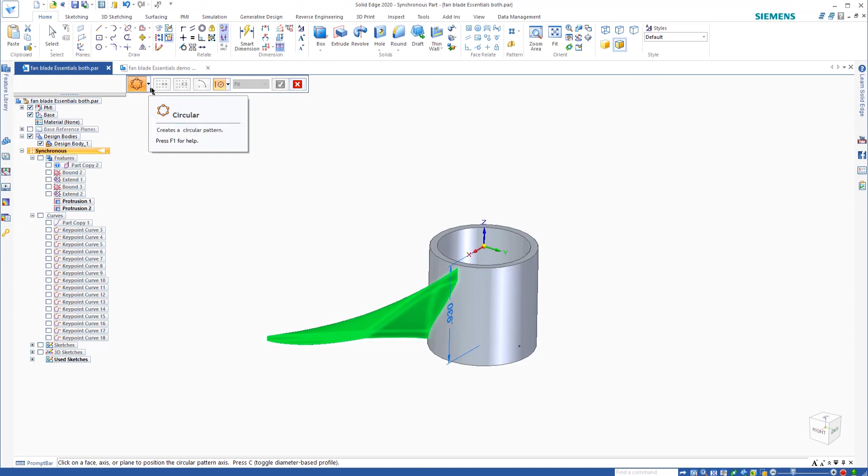And then set it to 4. And there I've created my circular pattern. Now from there you can do all your typical cleanup as far as adding rounds, and do all your modeling that you would normally do inside of Solid Edge.

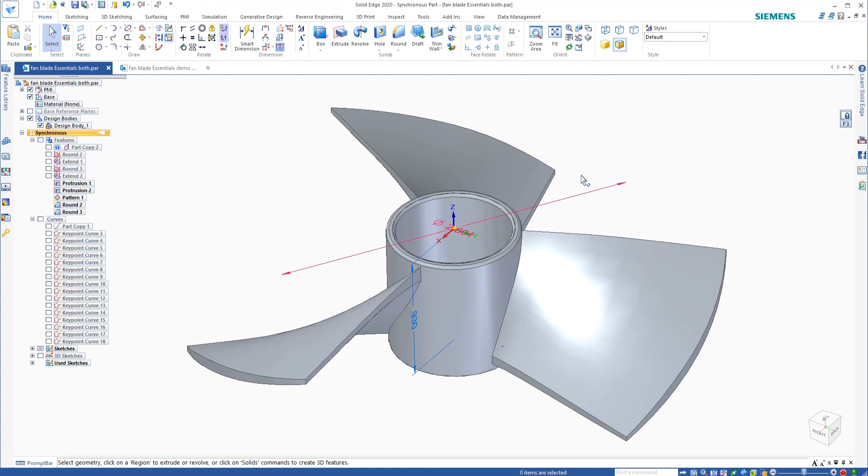So that is a basic demonstration of how you can work with Geomagic Essentials to capture the data with the Shining 3D scanner. Use Essentials to auto surface and draw curves on the surfaces of the part, and then bring that data over to Solid Edge and finish modeling inside of Solid Edge. If you have any questions, my name is Greg George from 3D Systems, and we'll be happy to answer your questions. Thank you.